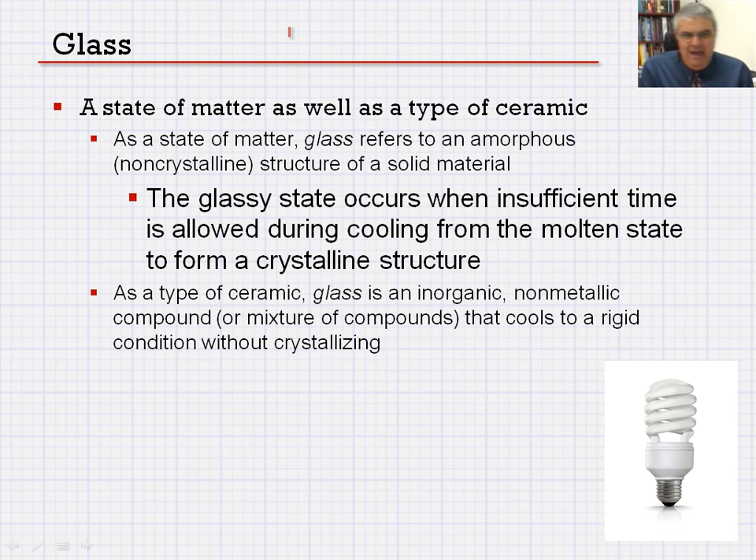So what is the most important ingredient in glass? That gets us to silica - SiO2. Silica is the best glass former, somewhere between 50 to 75%, sometimes up to 80% of silica is used in a glass product, of the total chemistry.

We like silica because the material, by its nature, transforms into a glassy state upon cooling from the liquid. Here's the major difference: most ceramics crystallize upon solidification, but silica doesn't have that property.

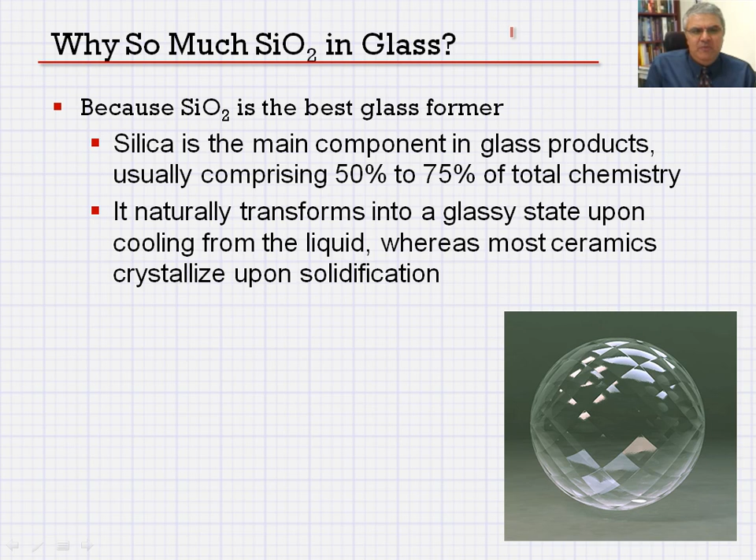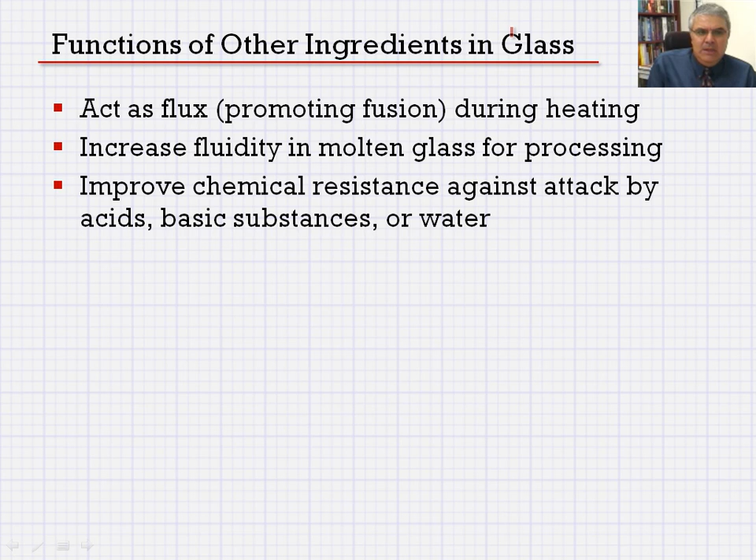So we're using that. Of course, we use other materials for other reasons in glass, examples are sodium oxide, calcium oxide, aluminum oxide, magnesium oxide, potassium oxide, lead oxide, boron oxide. Why do we do that? Because some of these materials act as a flux - flux promotes fusion during heating. Some of these materials help in the molding process. Some of them improve the chemical resistance of the glass against different environmental effects, including acids, basic substances, or water.

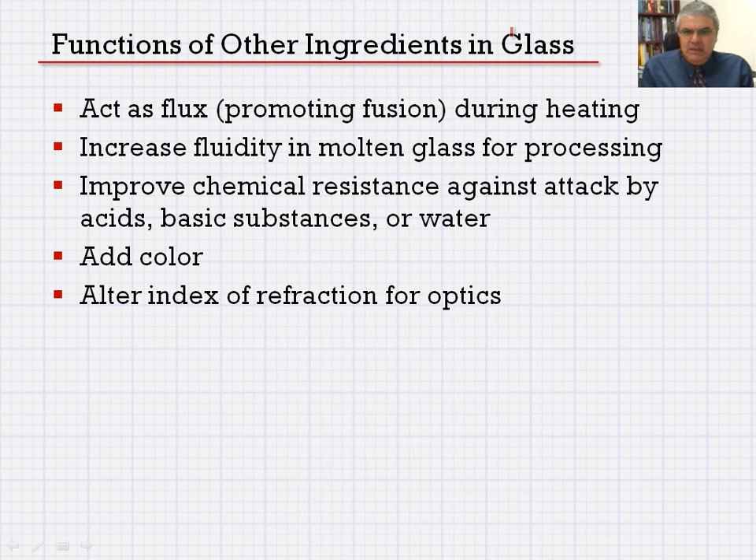Some additives add color, and some would actually, very importantly, alter the index of refraction for optics, the glasses that are used commonly in optics and so on. So glass is a very important material, and it plays a very important role in our technologically advanced society, and I cannot emphasize that enough.

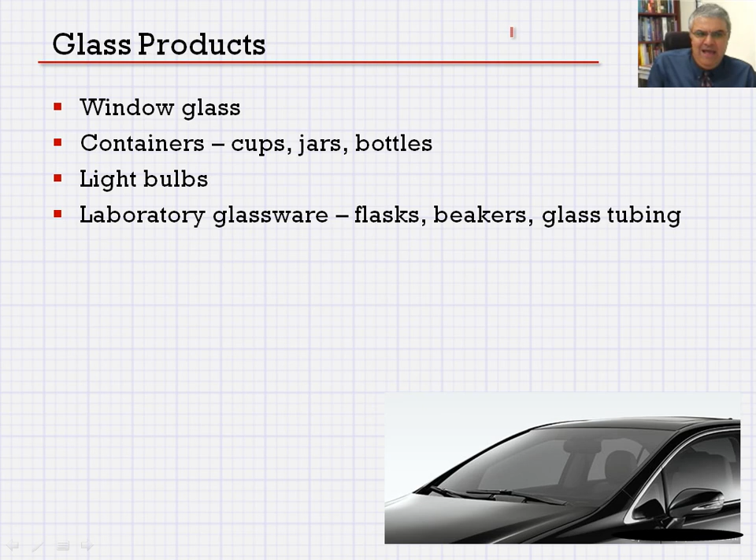Some of the glass products: window glass, containers, cups, jars, bottles that can be found in any home, light bulbs, the equipment we use in laboratories, laboratory glassware, flasks, beakers, glass tubing, and so on. Glass fibers, including fiber optics, insulations, optical glasses including lenses, and the list goes on and on.

So, what was glass ceramic? In glass ceramics, we're less concerned with the see-through properties that we want to have. We are now concerned more with the strength, because the application is now going to be different from the glass we use in windows and other applications I just went through, to the glass ceramics used as ceramics, tiles, and so on, walls, floors, and what have you.

So, how can we produce glass ceramics? A ceramic material produced by conversion of glass into a polycrystalline structure through heat treatment. Now, we want to have many crystals forming in our structure, and we can achieve that through heat treatment.

Remember, we wanted the glass to cool off very quickly from the molten state to its solid state without going through the process of crystallization. Now here we apply the heat intentionally to make it go through the process of crystallization. We're changing the structure.

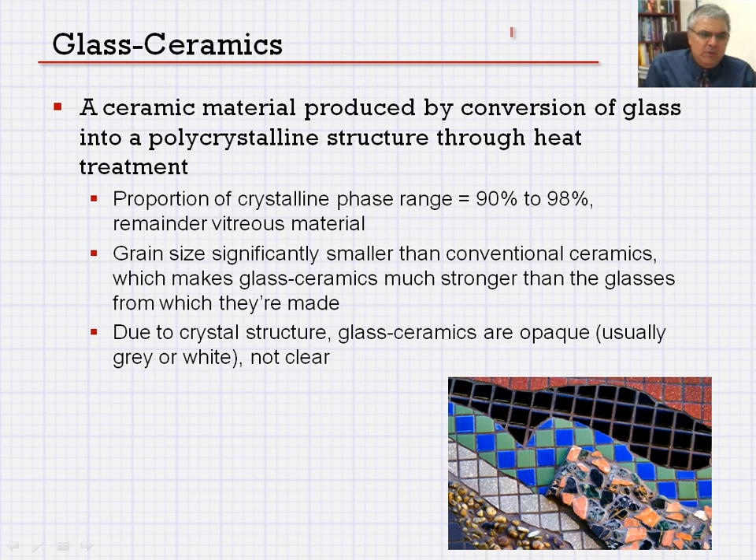This also makes the glass ceramics much stronger than the ceramics we can produce from other material. So, due to the crystal structure, glass ceramics are not see-through, they're opaque, and they're either gray or white, and we can add color to them using other compounds, but they're not clear in this case anymore.

So how can we process glass ceramics? Heating and forming techniques, we use that in glass working. Of course, this is going to create the shape of the product. Then we cool it off and reheat it.

As a result, we are forming what we call a dense network of crystal nuclei to form throughout, and that's really how it's done to make glass ceramics. Nucleation is actually the result. It results from small amounts of nucleating agents.

What are some of those? TiO2, P2O5, and ZrO2. These are some of what we call the nucleating agents. These are engineering terms. Of course, you may not be able to find them in any English language dictionary, but this is our vocabulary that we use in engineering, nucleating agents.

The heat treatment here would be done after the beginning of nucleation, and because we use this heat treatment, we increase the temperature to a much higher temperature, and it is going to cause a growth of crystalline phases. That's how it makes it denser and denser, and how we can increase the strength, really.

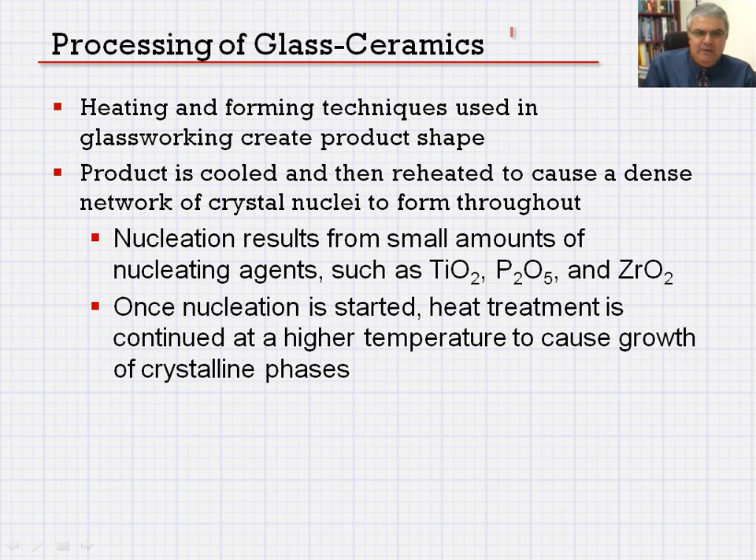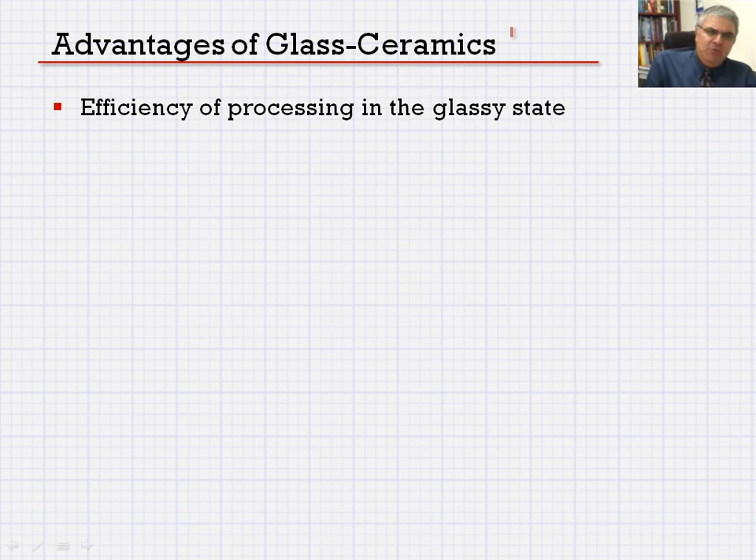So what are some of the advantages of glass ceramics? They are efficient - efficiency of processing in the glassy state. Again, we're looking at it from the point of view of processing the material. Efficiency there means least amount of energy used, least amount of time used, and least amount of work that needs to be done.

Those are really the bottom line of efficiency in material processing. The more time, the more money, the more people involved, the lengthier the process. That means more equipment, more time, more labor. It becomes labor intensive, and it makes it expensive. So like any other material we would like to produce, we are concerned with the efficiency of the material.

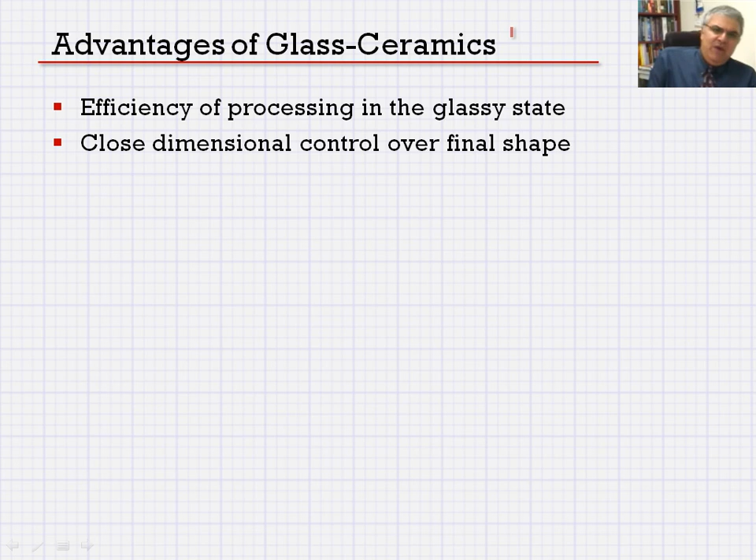The dimensional control is much easier over the final shape of the glass ceramics. There are certain mechanical and physical properties of glass ceramics that we like to have as opposed to regular glass or opaque glass, and that is the high strength - stronger than glass - and the absence of, or reduced, porosity.

They have low thermal expansion. We like that because for the heat gradient, we would like to make the slope of it as less as possible. The low thermal expansion is something that is highly desirable, of course, depending on the application.

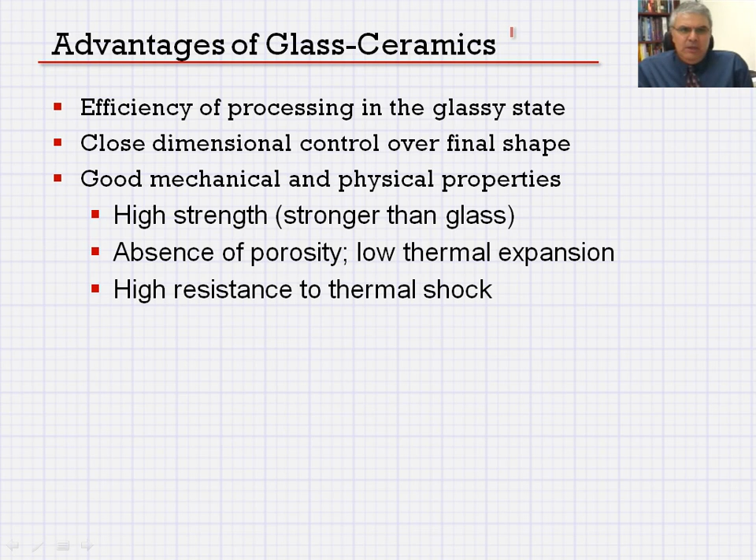And also the thermal shock resistance of glass ceramics. They are pretty high, or what we call, they have high resistance to thermal shock. So these are some of the advantages of glass ceramics.

So where do we apply glass ceramics? Remember, we made this dense structure that has good heat resistance properties. Now we're going to use them at places that need a material that can resist high temperature. Cookware is a good example that I put here. And anytime you want a good material as a heat exchanger, we do that. And we also use it in missile applications. So these are some of the applications of glass ceramics.

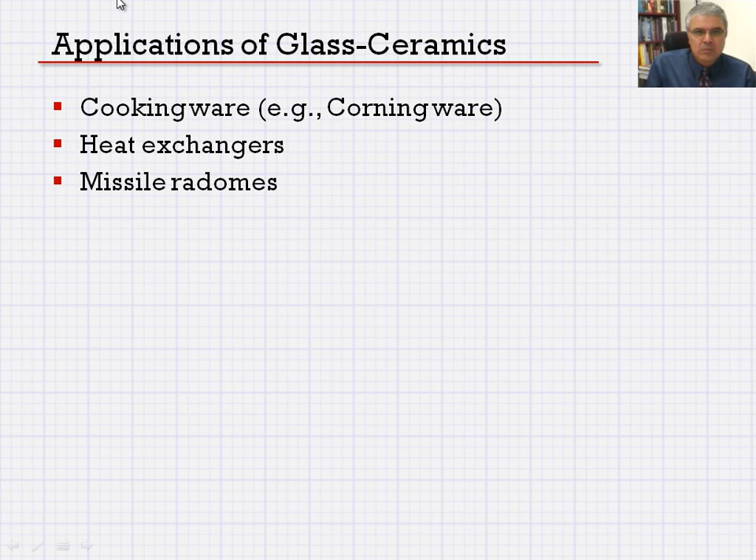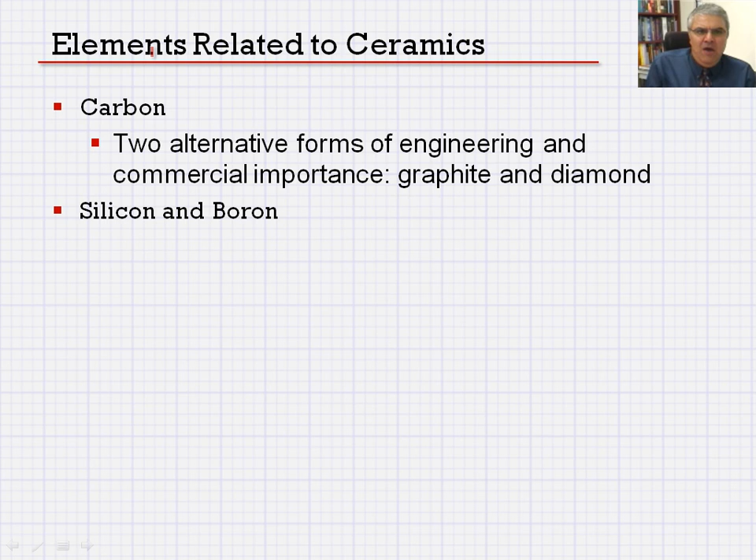Okay, so let's move on and discuss some of the elements related to ceramics. There are two alternative forms of engineering and commercial importance of the material carbon: one is graphite, the other is diamond. So there are also other elements related to ceramics. We call them related to ceramics because they're not really ceramics, but we apply them in the processing of ceramics, and it's important for us to take a look at some of those elements.

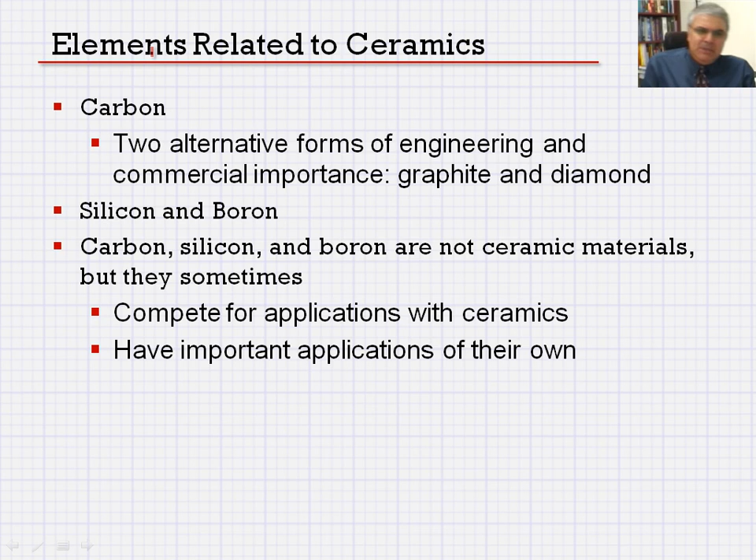Silicon and boron are also important elements. Carbon, silicon, and boron, as I mentioned, are not ceramic materials, so don't get them confused with ceramic materials. But they are important when we develop them, and they also compete for applications with ceramics, but have important applications themselves. Since we're not going to discuss too many of these, I thought maybe we should cover them here for the sake of completing our discussion.

So let's talk about graphite. Graphite is a form of carbon. It has a high content of crystalline carbon, in the form of layers. Of course, there is a certain advantage to having that in layers, and that is the bonding between the atoms in layers is much stronger than the van der Waals force that I'm sure you guys have talked about in your chemistry class.

That should be covered. So the van der Waals forces there are weak. However, the bonding between atoms in layers is covalent and strong. One of the problems we have is that these parallel layers are bonded to each other by the weakness of the van der Waals forces. They're weaker, while the layers themselves are covalent and strong, which is more desirable.

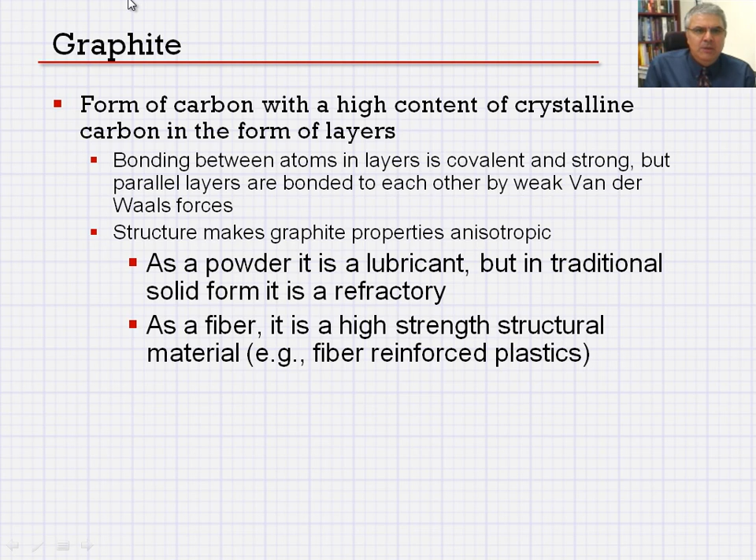And let me move on to a more expensive material here, and that is diamond. Diamond is really nothing but carbon — carbon with a cubic crystalline structure with covalent bonding between the atoms. This covalent bonding causes the hardness that we have in diamond. It is a very hard material.

The applications of diamond, for that particular reason of high hardness, would be in cutting tools. We use diamond blades to actually cut other materials, and that's why we use them on cutting tools, grinding wheels for machining hard materials, and of course we are going to use it anywhere we need a really tough and very hard material.

And of course we use that to sharpen grinding wheels and so on.

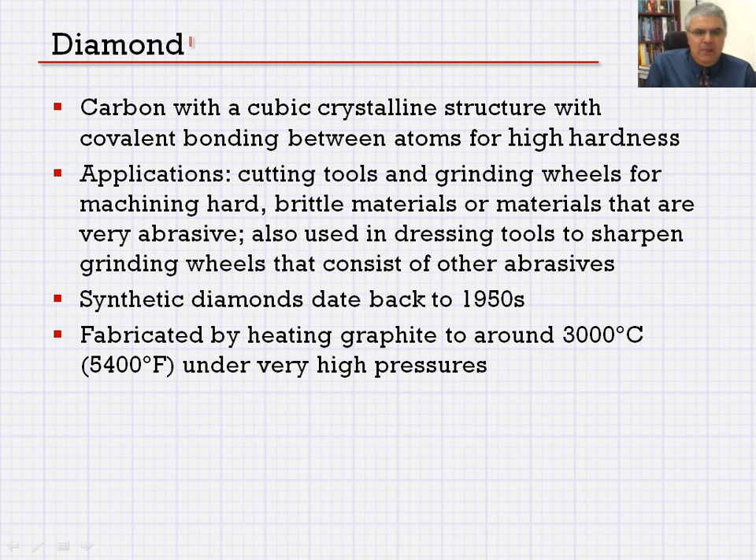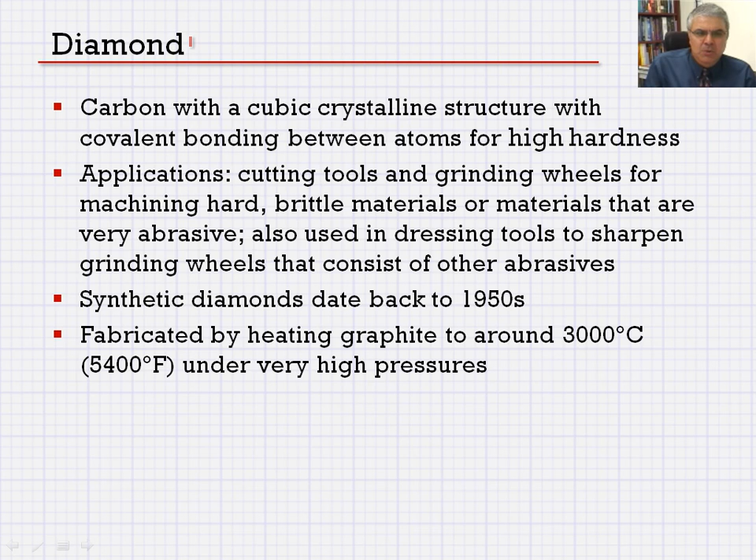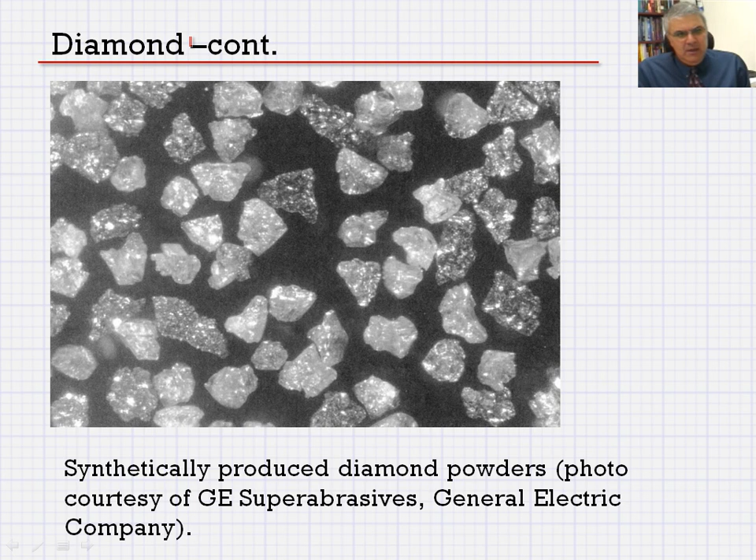We started producing synthetic diamonds as far back as the 1950s. That's really when synthetic diamonds got started. In this process, a diamond could be fabricated by heating graphite to around 3,000 degrees Celsius, or 5,400 degrees Fahrenheit, under very high pressure. So high temperature, high pressure is going to produce diamond. Here's an example of a synthetically produced diamond powder, courtesy of GE, the Superabrasives division of General Electric, just for you guys to have an idea what it looks like.

Silicon is also a very important material to be discussed here, so I dedicated three slides to talk about silicon. Silicon is a semi-metallic element, in the same periodic table group as carbon, and it is one of the most abundant elements in Earth's crust, about 26%, give or take, by weight.

Silicon develops naturally only as a chemical compound. It can be found in rocks, sand, clay, and in general in soil. It is available in the form of silicon dioxide or more complex silicate compounds. There are some properties that make it very attractive for some applications, including their hardness, their brittleness. They're lightweight, chemically inactive at room temperatures, and they are classified as a semiconductor.

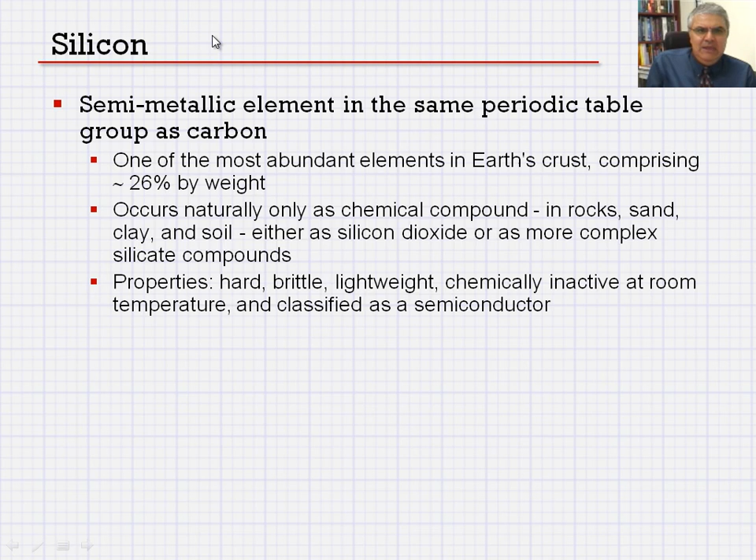You've probably heard of Silicon Valley in California. We're going to get into some of those applications shortly.

Let's take a look at applications and importance of silicon. It is pretty much used in manufacturing as ceramics, SiO2 -- we talked about this in glass -- and silicates in clays. They are alloying elements in some of the steel we've already discussed, cast iron, and in metals like aluminum and copper. We've already taken a look at those.

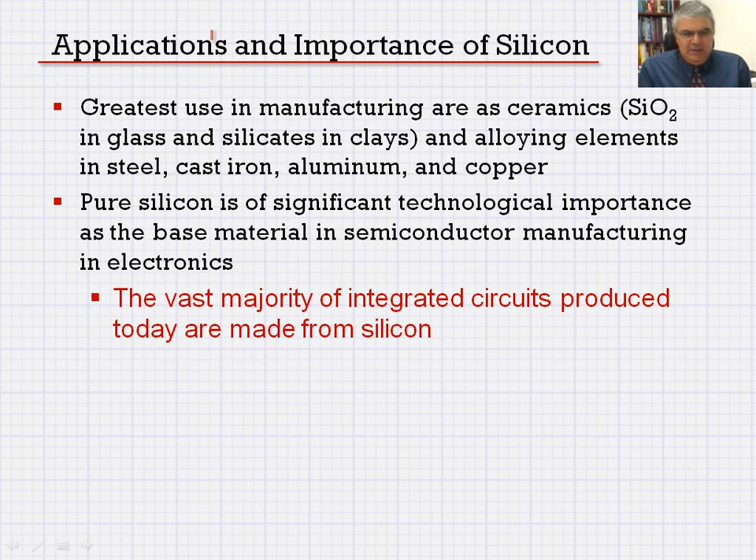Pure silicon is of significant technological importance in semiconductor manufacturing. The vast majority of integrated circuits produced today are made from silicon, so the application in the electronic industry is vast. I don't have the exact numbers, but I know that the majority of integrated circuits produced today are made from silicon. Very important material.

And last but not least, let's talk about boron. It's also a semi-metallic element, in the same periodic group as aluminum. It comprises only a small amount of Earth's crust by weight. Now, 0.001% of Earth's crust by weight is still a large number, but if you were to compare it to the other two materials we just discussed, it would be much less.